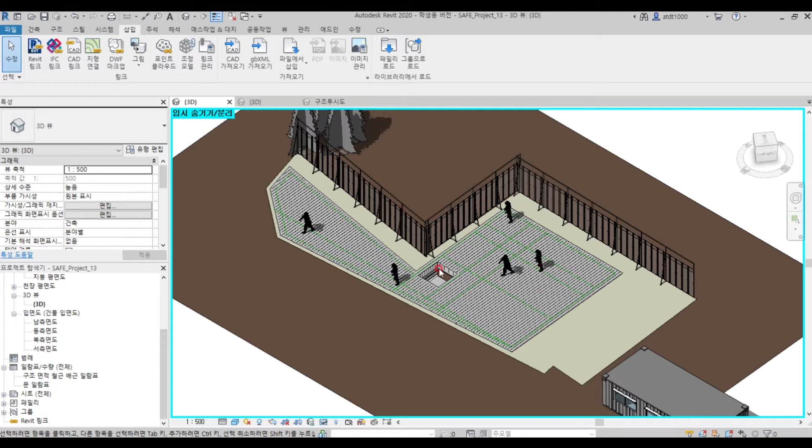After the bolting, steel frame members are delivered to the site. The delivery process is composed of four processes: designate prefabrication factory, prefabrication, test on the product, and delivery to the site.

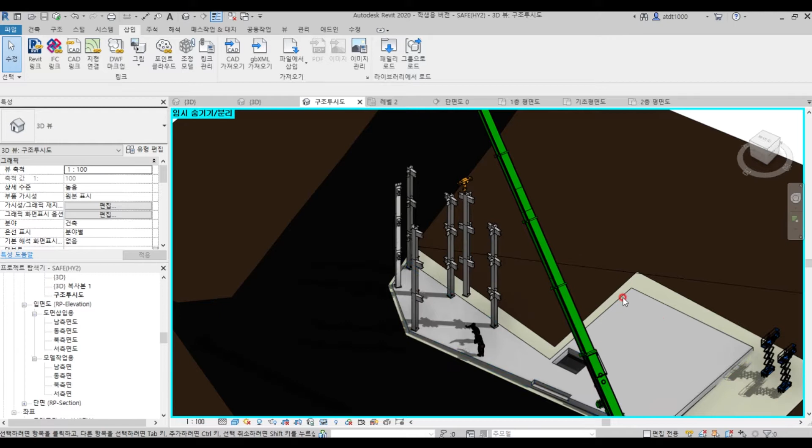Then lift the fabricated column to the proper position. A proper position means the position where the anchor bolts and the base plate are interlocked.

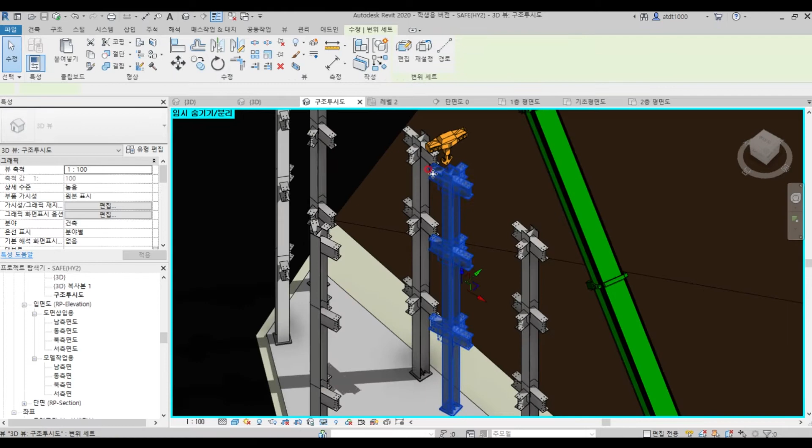Taking a closer look at the steel frame elements delivered to the site in this project: a short segment of beam is stuck to the column like a girder. This is because this project chooses the bracket connection.

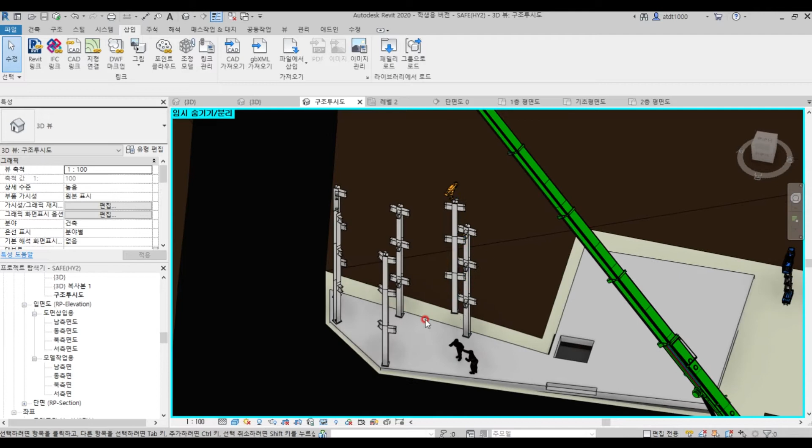A normal rigid frame has three complicated connections: column to beam, beam to beam, and column to column. So even a minor error in connection results in a major error in the structure above the connection. Erecting is difficult to modify once there's an error.

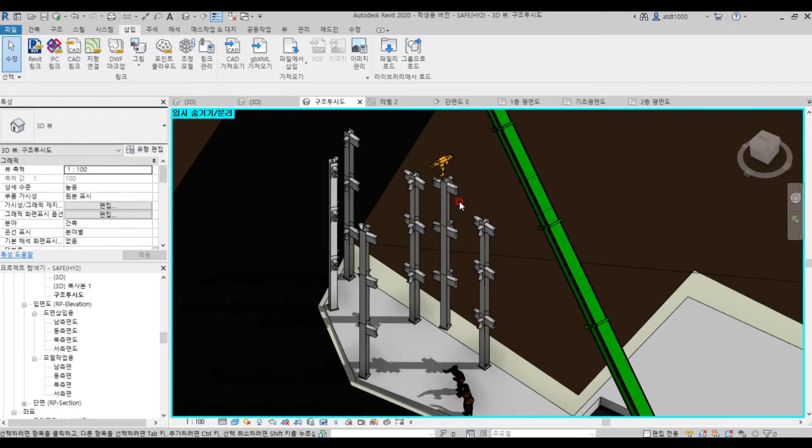That's the reason we level the base plate by filling mortar under them. Leveling error is the most important thing in erecting.

When choosing bracket connection, cut the beams at the point having the least bending moment. Weld the beam to the column in the factory.

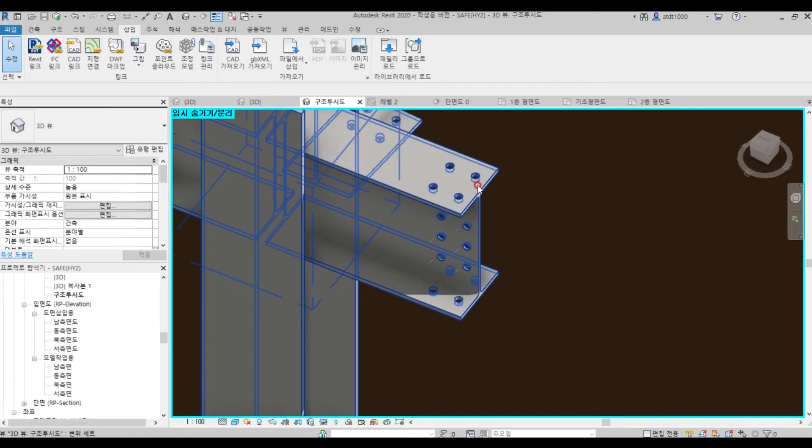Perforate holes on the beam to make space for the high-strength bolt. Then this structure can be delivered to the site. Also, the base plates are all welded to the columns.

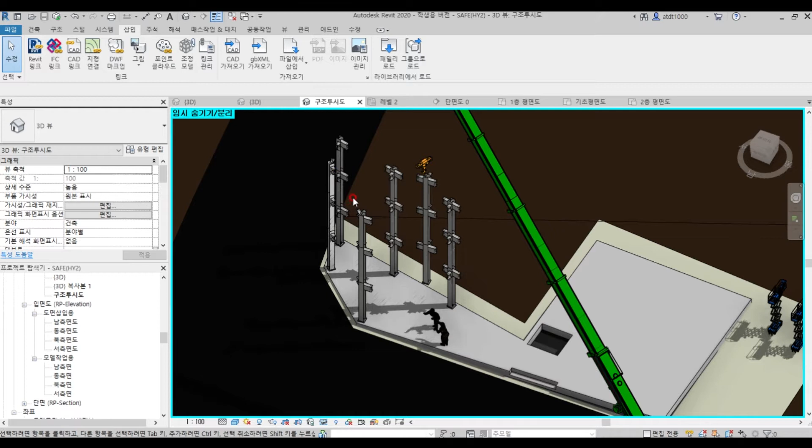After the manufactured members with beams are delivered to the site, high-strength bolt connection on beam to beam should be done. The advantage of this connection is decrease of construction period due to the prefabrication in factory.

Especially in this project, building with differential angle on the corner is inevitable from using bracket connection.

The erecting method in this project is the tier construction method, one of the conventional construction methods. The reason we use the tier construction method is primarily because of bracket connection and its frequent choice mainly in small buildings.

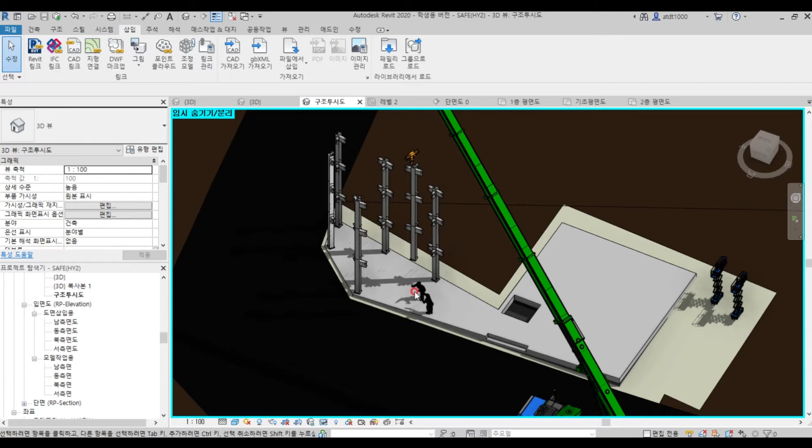The tier construction method erects columns first, then bolts them with girders to finish framing. Without this method, column and beam should be installed level by level, one level at a time. Therefore, using bracket connection and tier construction method at the same time is the most efficient.

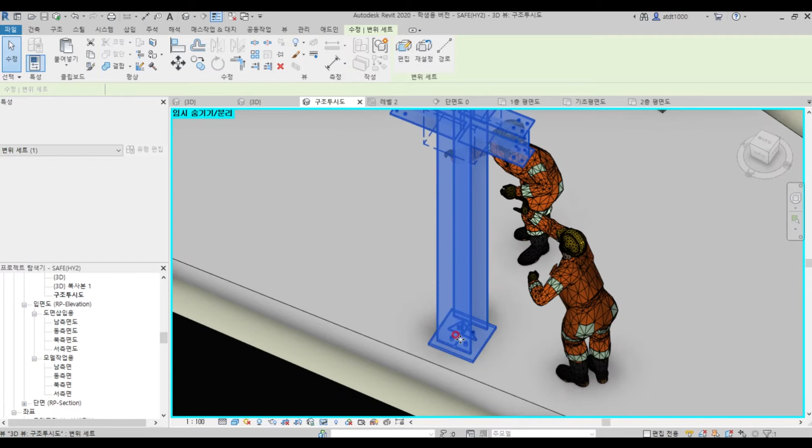So make holes so anchor bolts have the same displacement and can be bolted - float bolting. Now the columns are stable.

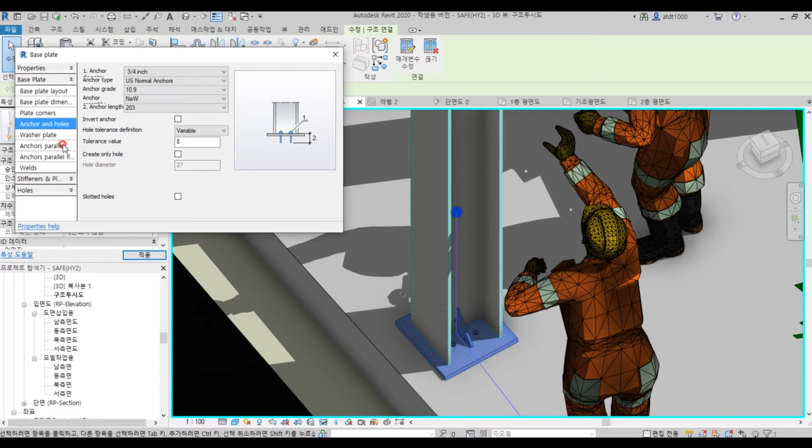Now let's explain using this model. Place the structural elements on the anchor bolts and bolt the column and anchor bolts together. Lifting for a tower crane cannot be used in small building construction, so lift the elements using a crawler.

After the columns are erected, go through the beam connection process. Bracket connection already provides short span beams on each column, so bolting beams to beams can progress immediately.

Moreover, for immediate bolting, all beams are already preformed in the factory. So in the field, place splice plate and bolt on every connection between two beams. This bolting period should be short if possible.

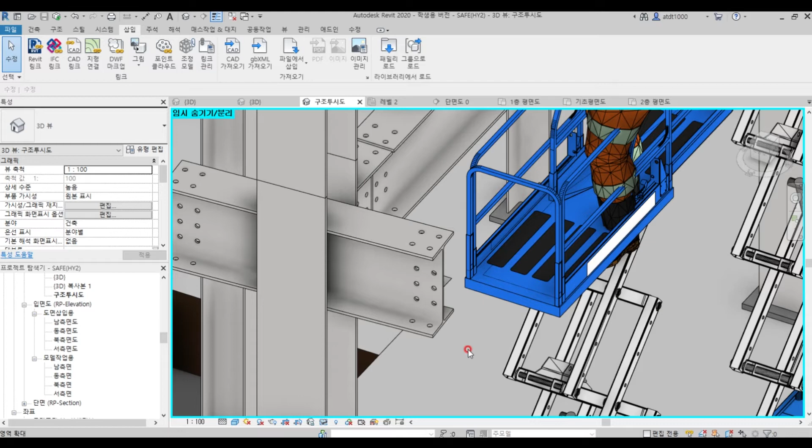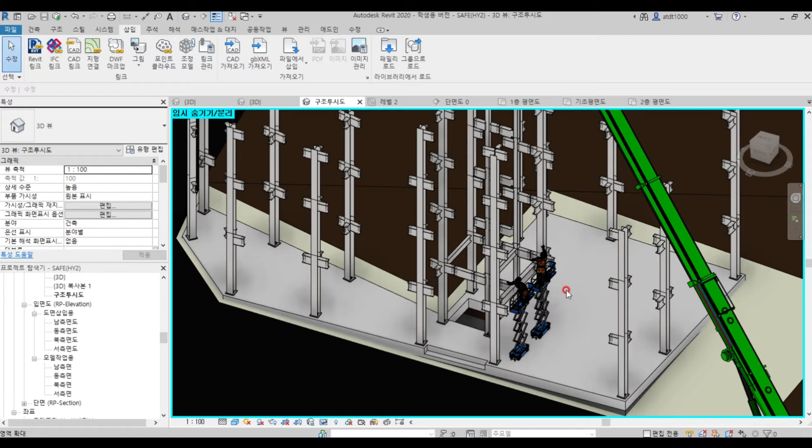So after the columns are erected, work should progress. Using the tier construction method, one of the conventional construction methods, beams are bolted from bottom to top. And in the floor plan, beams are bolted from core to perimeter.

Beams are lifted by crawler, and temporary bolting on lifted beams would be progressed with workers. Temporary bolting means that not all holes on beams would be bolted.

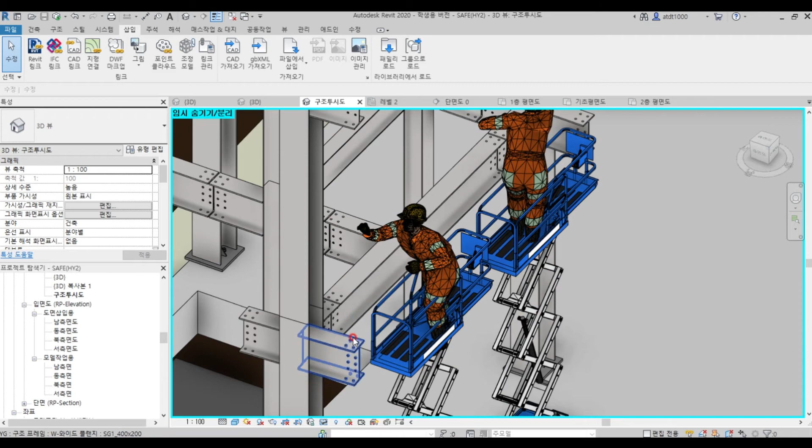Temporary bolting literally means bolting the structure temporarily. So bolt in this process only 1/2 or 1/3 of the entire number of holes.

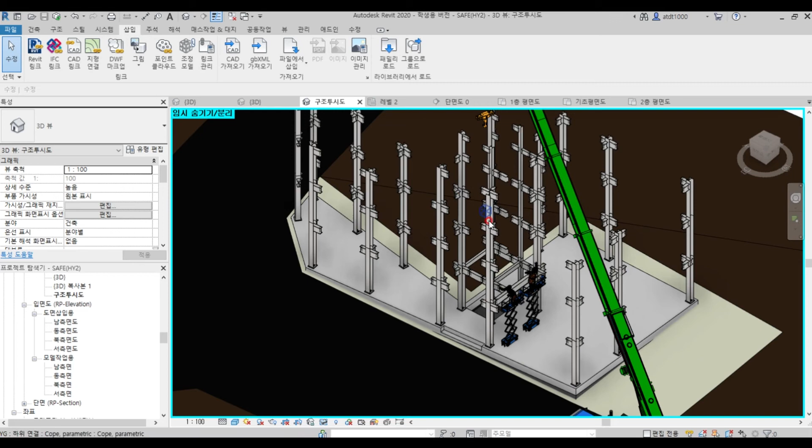The reason for temporary bolting is that partial permanent bolting increases the possibility of tilt and twist of the structure above, caused by error on joints.

So temporary bolting should be processed from the core. Lifting for temporary bolting requires 2 workers for manual bolting.

Let's take a closer look at 2 connections: beam to beam and beam to column. Bracket connection is chosen for this project.

The short beams are already welded onto the column in the factory, and prefabricated elements are delivered. So these beams would be bolted using high-strength bolts.

There are 2 steel plates on both sides of the column webs, and these plates are called stiffeners. When the connection of 2 beams is subject to lateral force after permanent bolting, stiffeners reinforce the connection to protect from shear force and bending moment.

The stiffeners are delivered with the 2 beams from the factory as well. The connection makes 2 beams meet together, and for an easier connection, beams should be cut with a distance of about 5 to 10mm between them.

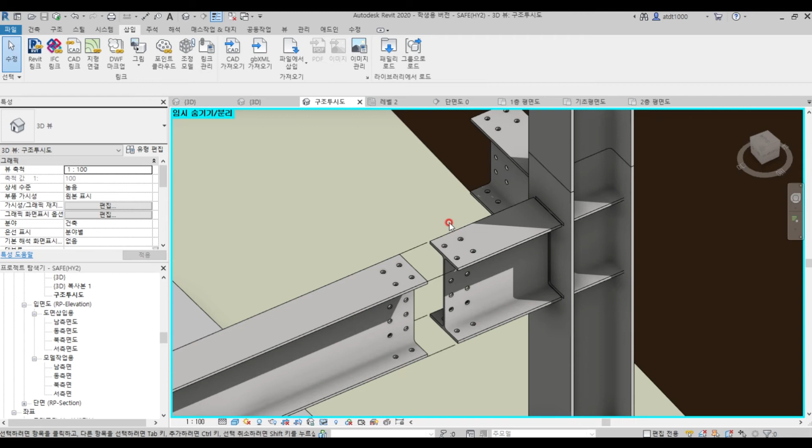In this way, the beam structure would be connected, and 2 workers would work on temporary bolting at the end of the lifted beam. Let's visualize the structural connection.

To make columns more stabilized, temporary bolting should be progressed as fast as possible. And the connections are done.

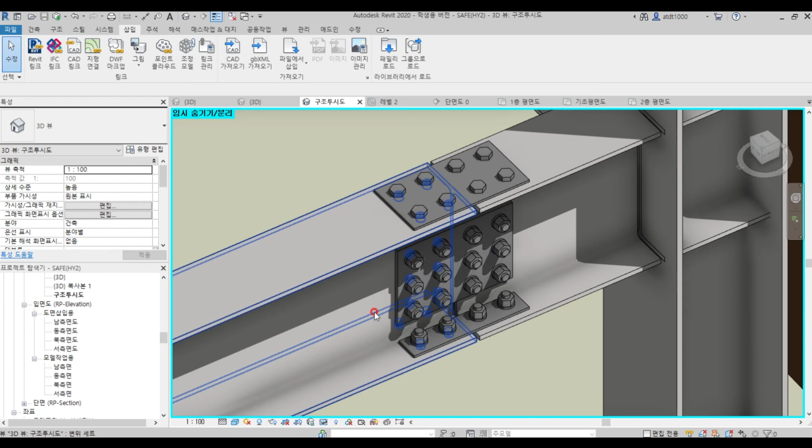Splicing plate on the top and bottom. Stiffeners on both sides of the web should be completely attached to the beam.

For an utmost connection that doesn't shake after permanent bolting, temporary bolting using high-strength bolts starts from the core and ends at the perimeter, similar to erecting columns on the floor.

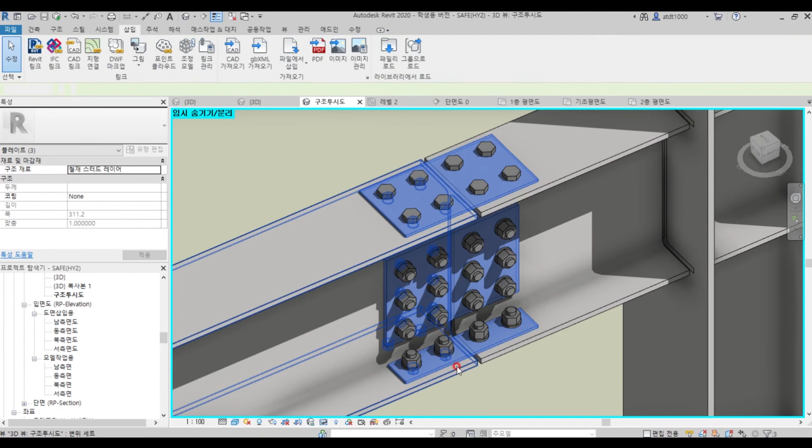Bolting should be processed on 1/2 to 1/3 of the entire holes. After temporary bolting is completed, correct deformation on the entire steel frame.

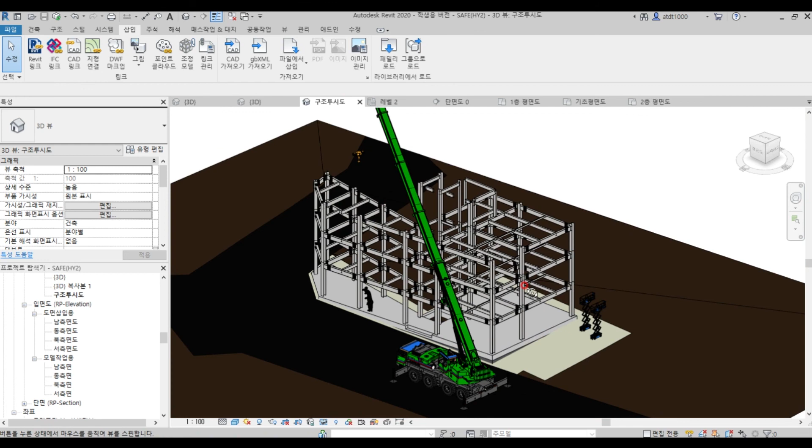The process of correcting deformation must be progressed on each level. Determine the existence of deformation using a laser level, and if it exists, unbolt and bolt repeatedly for leveling.

All deformations are modified to make the structure free of deformation. In the case of big construction work, diagonal bracing using turnbuckles and wire would correct deformations.

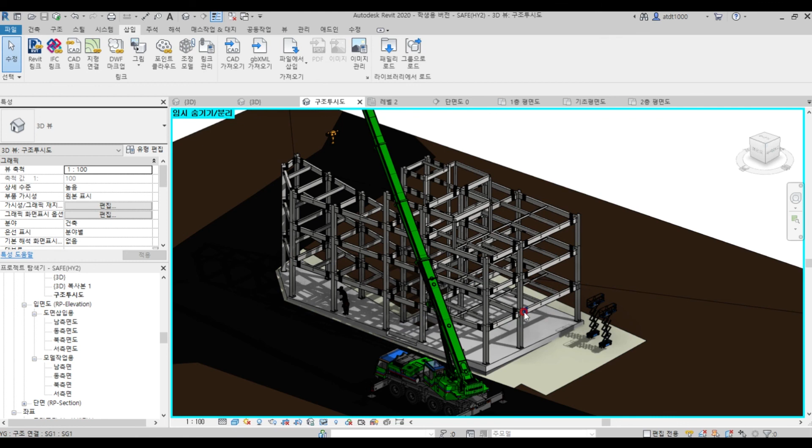So this is the end of temporary bolting. Using impact wrenches, process permanent bolting and complete it.